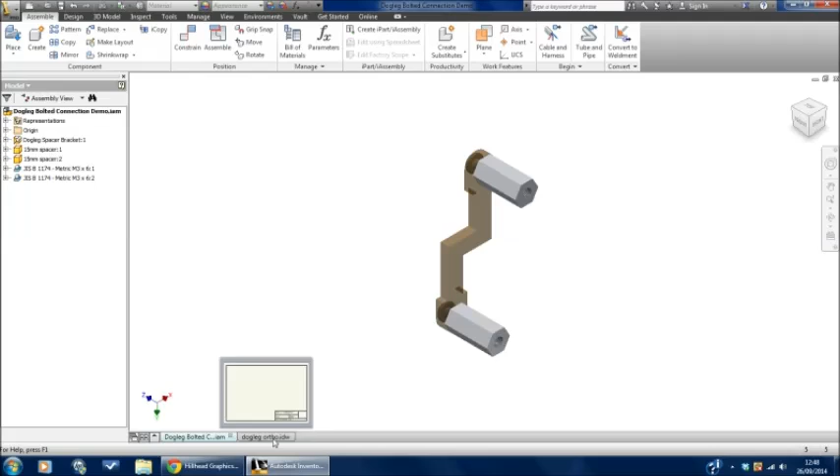I've opened up the drawing we created called drawing template. That's the one that had the border and title block and all the settings changed, and I've just renamed it Dogleg Ortho to give it a unique title.

So go to base view, and Inventor anticipates that I want to draw the object that's already open in the background. If I move over to the right, you can see it hovers on the cursor. I can change which orientation it comes in using these commands here. I do in fact want it to come in from the front.

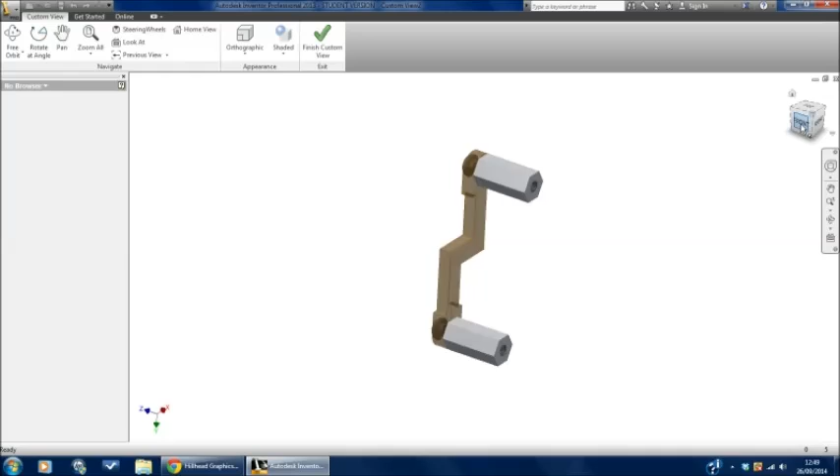If you get a situation where it's not the way around you want it, you can press this little icon and it will bring up a separate menu where you can orientate it round, manually control it, and press the tick when you're done, and that will put it in the way you want it.

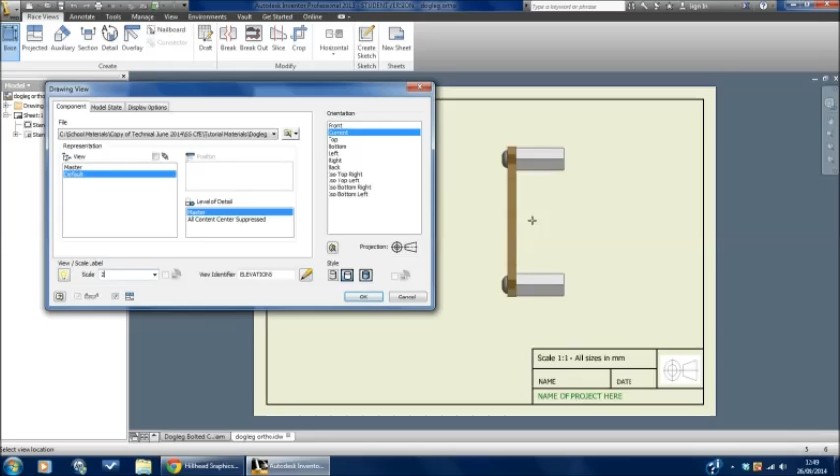Right now it's in as a scale 1:1. I don't want it to be scale 1:1, I want it to be twice as big, I want it to be 2:1. So I go over to this menu, I could use the drop down, or I could just type in using the keyboard what I want. So there you have 2. As soon as I put a 2 in, I get it twice as big, a scale 2:1.

Now I'm happy with that, but I'm going to make sure I have hidden detail, so I'm going to press this button here. There's a lot of commands in this menu that we can come back and change, but for now this will do. I'm going to press OK, and it's generated a view.

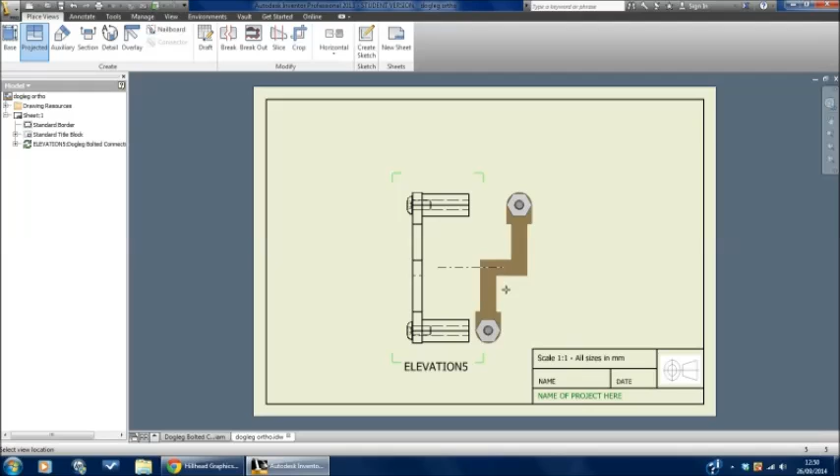You can see that immediately after generating a view, it will want to automatically create other views like an end elevation here, or a plan here, or you could even, if you took your mouse up to the top corner, get an isometric view. I'm going to choose not to do that right now, I'm just going to press the escape key.

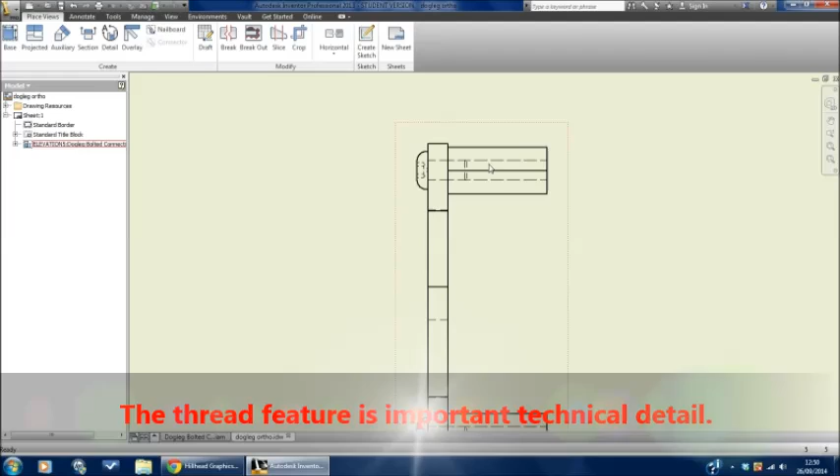There is some detail here. We can actually increase the level of detail, and we particularly want to do that because of what's called a thread feature inside. So if I hover next to the dotted line, I can right click and find display thread features.

You can see that additional dotted hidden detail lines have appeared. I'm actually noticing a slight mistake in this, which I can go and revisit later, but I do want an extra level of detail for the thread feature.

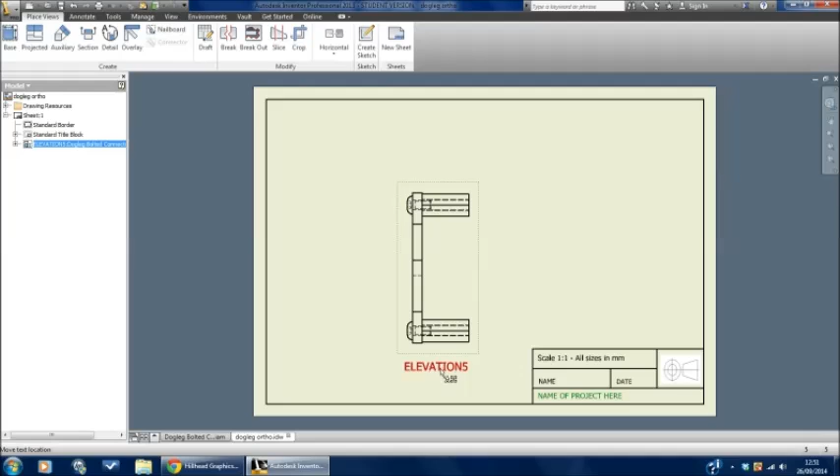I've got an issue here with the title. It's called Elevations. You'll notice that in my drawing here, the text is below the drawing that's been generated, and that's because of the settings we changed when we were working in the Manage and Styles Editor exercise, the one we did before setting up British Standards Dimensioning.

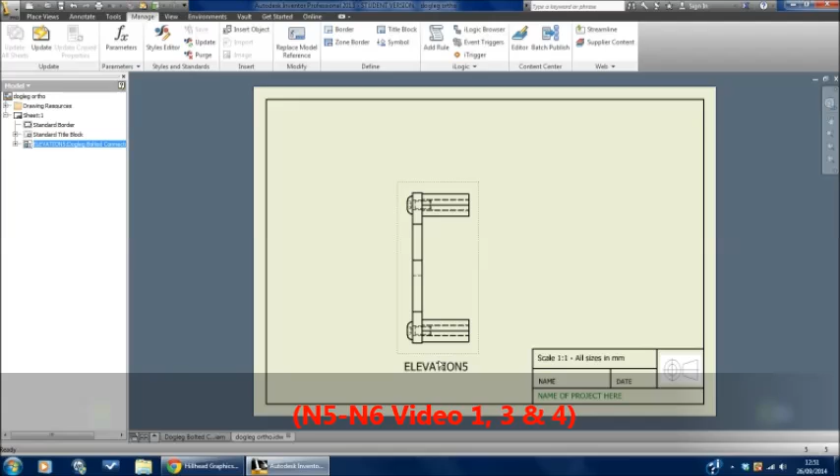So I actually consciously made a change to tell Inventor to put the labels below the drawings, and that's happened for me. If that's not happening for you, it's not a big problem because you can drag on any text entry and move it about. It's just called Note Text, and we can move it about. You can right click on it and get various options like Edit Text Style, that allows you to change the colour.

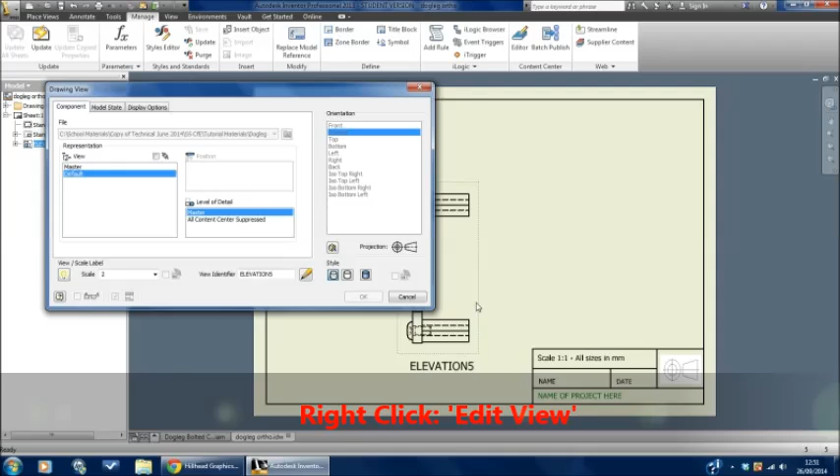I want to change what it actually says though, and to do that we have to right click and press Edit View. That will take us back to the menu we were in at the beginning. I'm now going to cover that text, drag over it and just change it to elevation. I'm going to press OK, and I'm going to get that. That's good enough for now.

I think this should be slightly higher. You can see that the text moves up with it, and now I can begin to bring in other elevations.

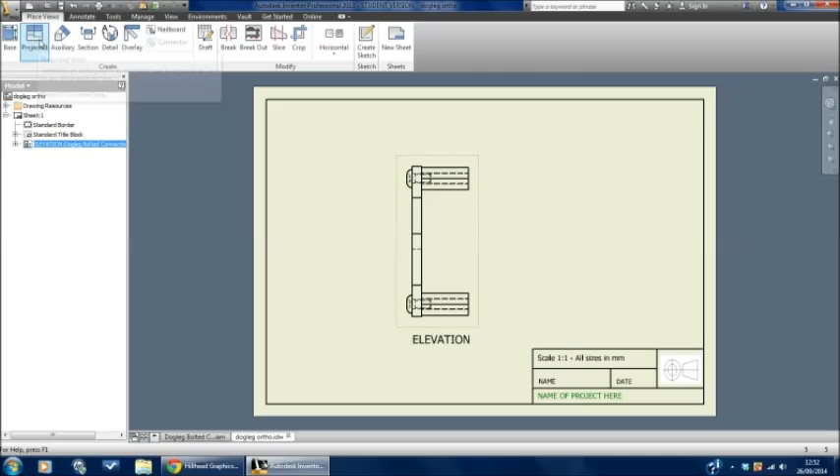So we do that back in the Place Views tab using something called a projected view. I'm going to click on the initial object, pull to the left, click, right click, and click on Create. And I get a very detailed drawing. I get the thread feature, I get all of the hidden detail generated straight off this.

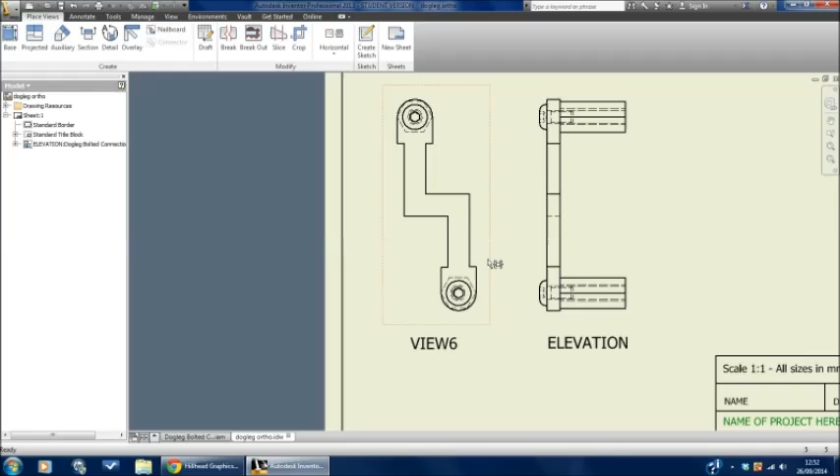Again, I've got an instance of the wrong label, so if I just hover over this, right click, edit the view, I can change it there. I'll just call it End Elevation. That's that done. Now we can start working away at doing things like dimensioning. That's all in the Annotate tab.

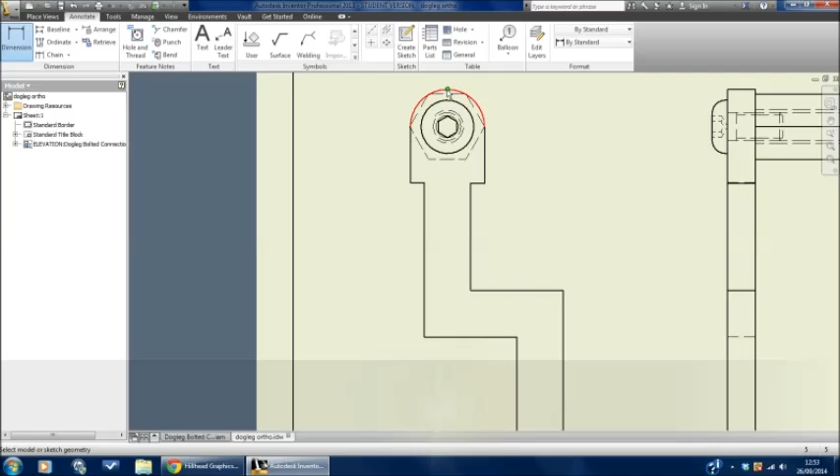Dimensions go in simply by using this general dimension tool. I'm going to put one on for the overall height, so I'll hover around until I get a green snap dot where I want to start it. I'll come down and get the exact same point at the bottom where I want to finish it, and I can now pull away to the left and put a dimension on.

You can see the dimensions sometimes stop and become dotted. That's just at a point where Inventor deems it to be a suitable gap, maybe about 20 millimeters away from the nearest edge. I'm just going to click there and press OK.

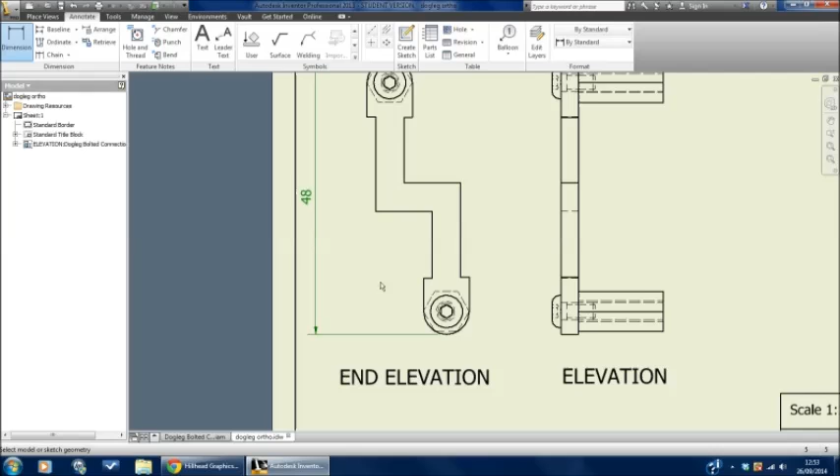You can see that my dimension is green, and my text is turned round. There's no additional decimal points or zeros. There's a small gap down here because of the changes we made in the styles editor previously. All of your dimensioning would be done in this exact same way.

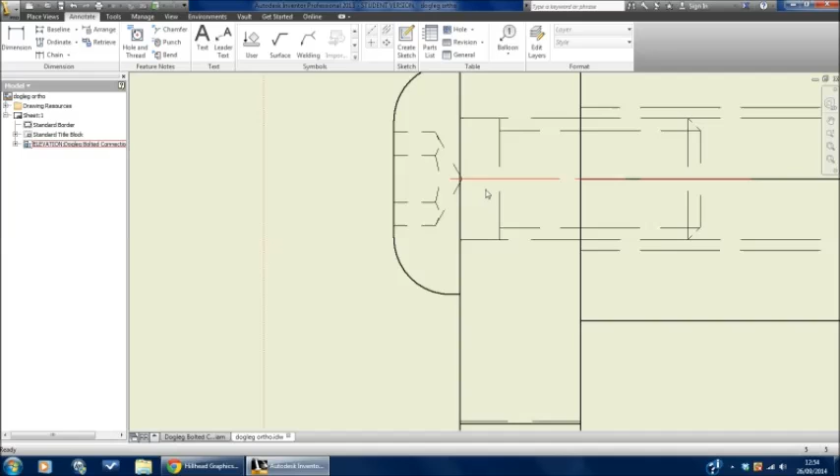The other thing you'll want to do are what are called center line bisectors, for anywhere you've got a hole. I'm going to use that tool, click a line there, click a line there, and I'll get something called a center line bisector. As before, if you hit the escape key, you can pull these items and stretch them.

We can also put in center points or center marks, using this tool here. You can come down, find anything that's circular, just click on it and you'll get that there. Again, remember there's a facility to edit these.

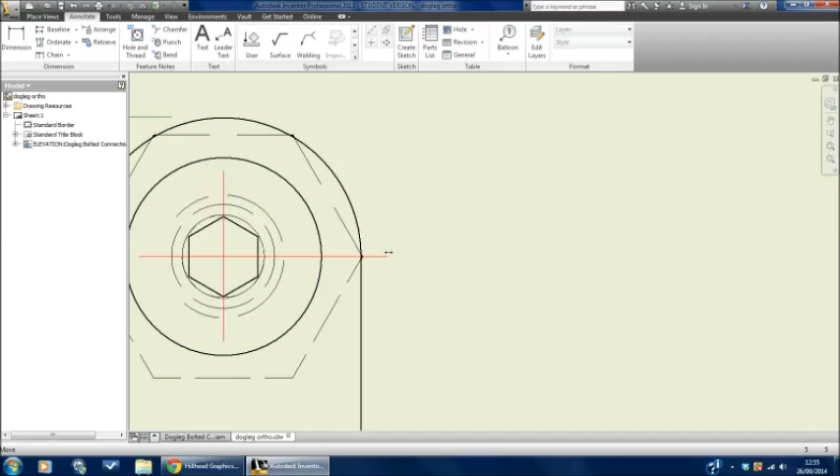We can right click on it, find the edit command, and actually add and remove dashes. I can also stretch this out and make lots of changes to make this slightly more detailed. You've got the ability to edit and also take dimensions from these. I can pull this out to a larger or smaller size until I'm happy with it.

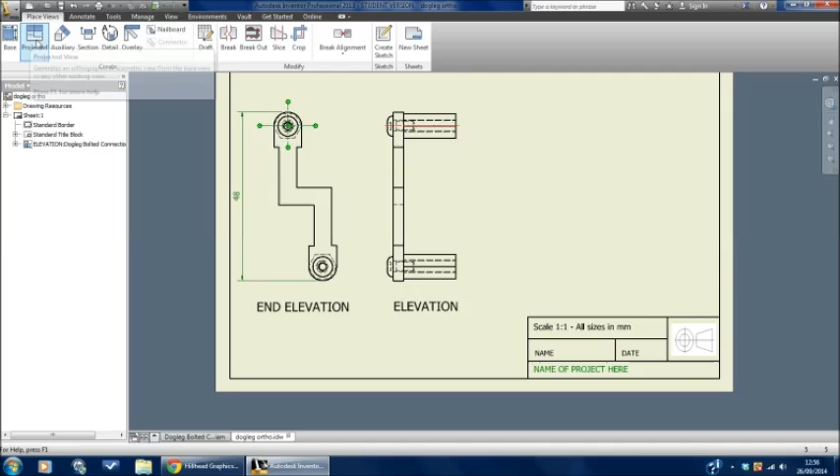The final thing we'll show you is how to get another third view, an isometric view. We'll go back to base view. We could do that, but we're going to use projected view instead. I'm going to click on that, click on the main elevation, the one that came in first, and pull away to the top left or top right. Click, right click, and press create.

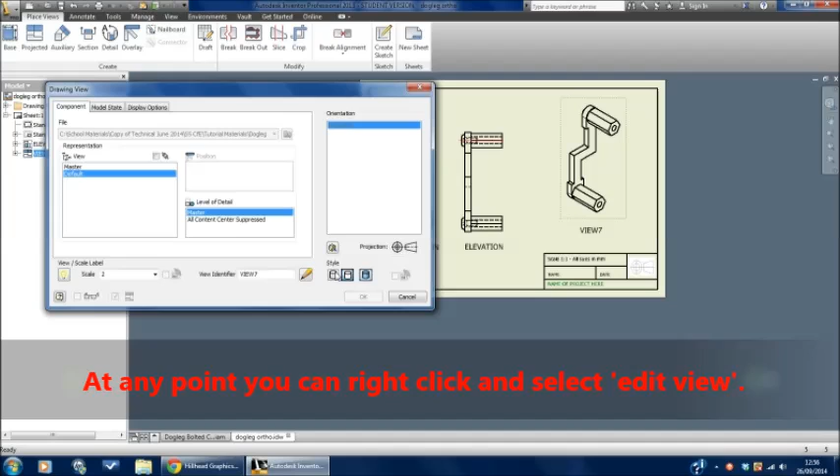I'm just going to move that down into a correct position. I'm actually going to add a bit of interest to this drawing. I'll right click on it, go to edit view, and make this rendered, so it's shaded and rendered, then press OK.

Sometimes you can't do this because there's a little dot in this style from base part of the menu. Just undo that if it's there, because that changes the style for your elevation to the style of any new drawing you create. Final thing to do here would be to change the name of it to isometric view.

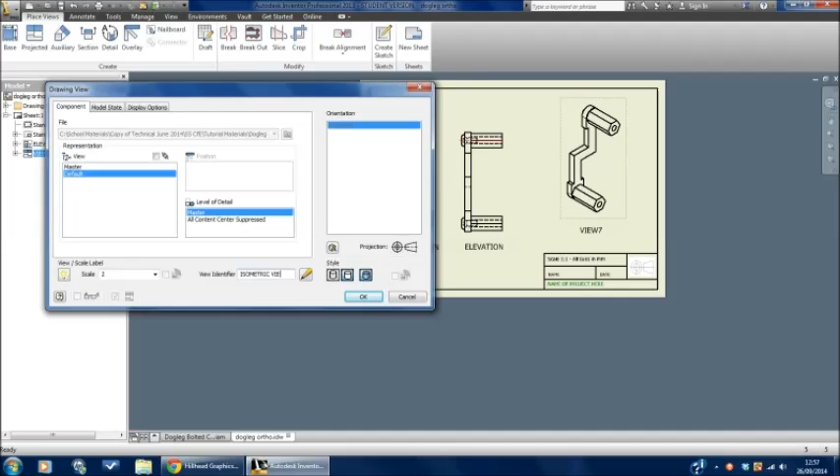Okay, this drawing's nearly complete. I don't want to overcomplicate it with any more views. I'm going to take a little bit more time adding dimensioning and annotation, but there's one important thing I'll show you before the video finishes, and that's that this scale is wrong. Remember, we changed the scale.

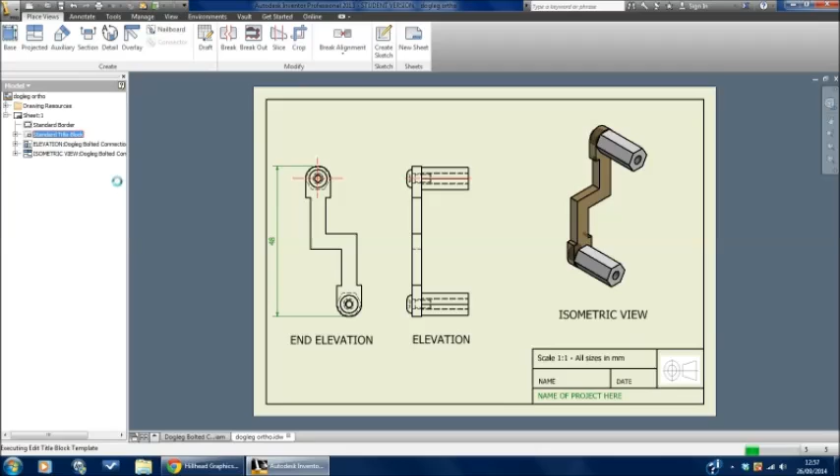To do that, we would have to go back to the standard title block, right click on it, and press edit definition. That'll unlock it and allow us to change the text, and we can at the same time change our name and stuff like that too.

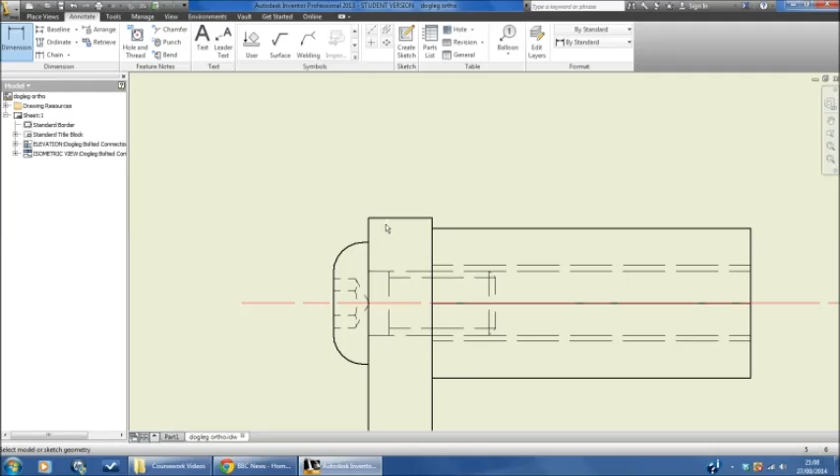I spent a bit of extra time adding some more dimensions, and I've also put in a plan view, using the projected view feature for a third time. The final dimension I'm going to put in just here, using the Annotate tab, the General Dimension tool, placing a dimension on this item. You'll see when I pull this up, it does detect that it's a small dimension, so it puts the 3 in between the arrows and places the arrows on the outside edges of the dimension.

It's still not quite perfect. I'm going to click and create it. I'm going to show you one final thing you can do to change this.

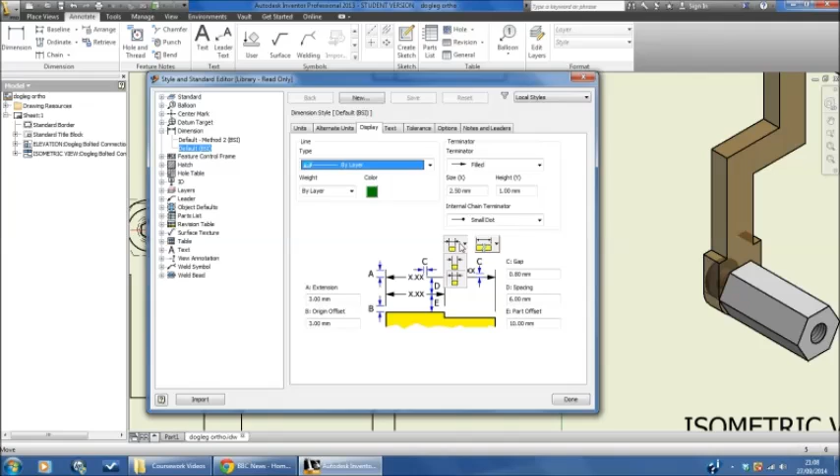You can right click on any dimension and bring up a menu that says Edit Dimension Style. This takes you into a menu similar to the one you've seen in the Styles editor, with various tabs, and we want to go to the one called Display. I'll go to this little box and basically get rid of the line that goes in the middle of the dimension by pressing that button. When I press done, it asks me to save it, which I do, and now that there's no arrow in there, it's more in line with British standards.